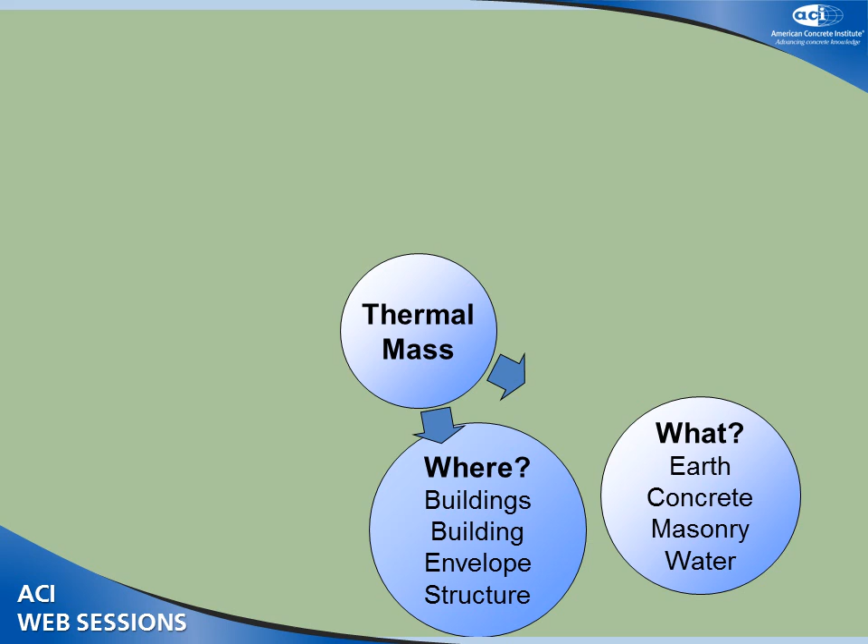One of the big questions I have in mind about this whole seminar is, number one, why are you here? What information are you trying to learn from these presentations that you can take back to your clients and customers? But also, why are we talking about saving energy? There are many different reasons you may want to save energy, whether it's to meet code, reduce your energy use, reduce your carbon footprint, whatever that happens to be.

But the information I'm going to talk about really centers around getting buildings down to net zero. That's buildings that produce at least as much energy as they use, so their net energy consumption is zero. We're not going to talk about carbon neutral buildings or thermal comfort buildings, but those are other reasons why you'd want to use a strategy like thermal mass to reduce your overall energy use.

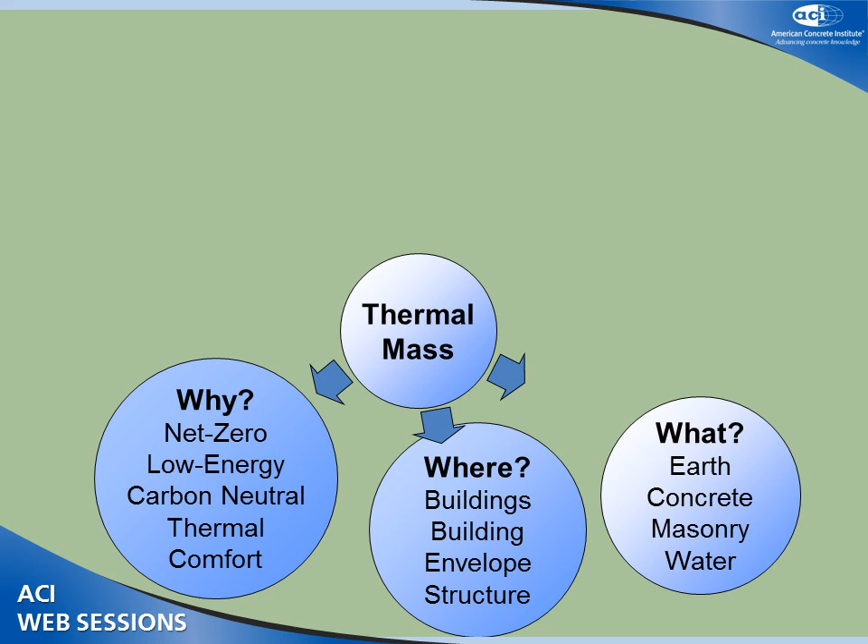The next big question I have is, who's the decision maker? Who is the person in the whole design and construction process that determines whether or not the building is going to have thermal mass in it, whether in the walls or the floor? It could be any of these players: the architect, the mechanical engineer, the structural engineer, the building envelope engineer, the owner even, or some consultants who work on lighting and acoustics who might have some input on using thermal mass inside the building.

But I really think it's the architect who decides. If they're passionate enough about a material or a process or something, they'll make it happen in the building. A lot of interesting energy features in buildings are there because the architect has a passion for it, and they're the champion for it. I don't really see too many architects having a passion for thermal mass, so I think that may be one reason why we're not seeing it used in more buildings.

But I think there's other reasons, and I'll get into those in the presentation. And then, of course, we talk a little bit about how to use thermal mass in the building as a strategy to reduce overall energy use.

We've got information from traditional forms of architecture that show us that thermal mass works really well and makes the building more comfortable. Classic example is Adobe-style architecture. We've got lots of experience with passive solar houses, decades of experience now, and hundreds of publications that tell architects exactly what the building needs to look like, what materials need to be used, what form it needs to have to reduce overall energy use.

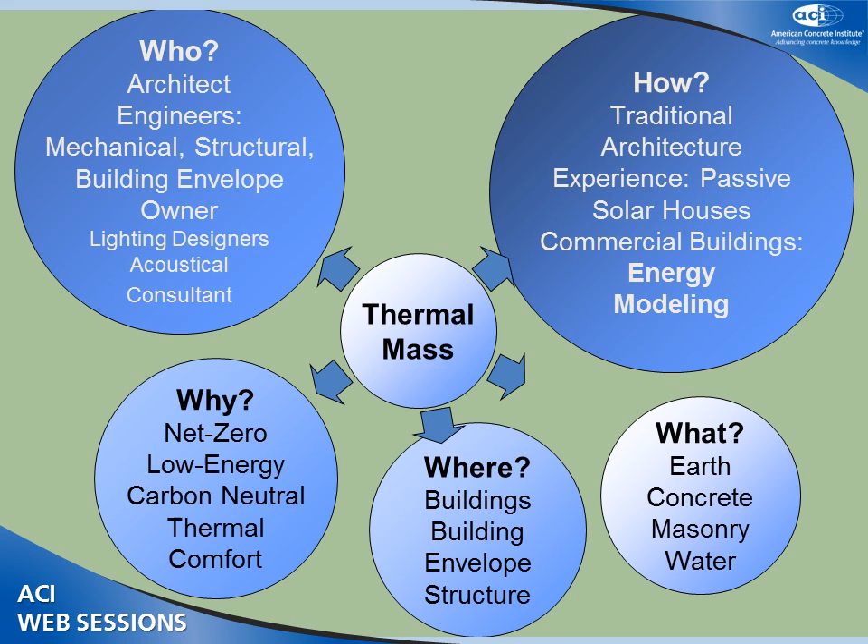And what we're trying to do in this presentation is to simplify it down to just a few parameters, so we can talk about it intelligently. But that's pretty difficult, as you'll see.

So just to give you a bigger perspective about design and construction in buildings, this is the traditional design phases for architecture, starting at concept phase or pre-design, where the architect meets with the owner to determine the owner's project requirements, and they also do some background research on what the site has in terms of site resources, like prevailing winds, environmental considerations, such as whether it's a wetlands area, and what the local zoning requirements are for buildings.

Then they move into the schematic design phase, where they take this information and come up with some general ideas of what the building will look like to meet the owner's project requirements. That'll typically be a floor plan, a site plan, a couple of building elevations, and some building cross-sections. But nothing more detailed than that, typically.

Then, during design development, they take the next step and choose one of those schematic designs and further develop the details. Then, during construction documents, they take those design ideas and produce a set of construction documents that someone can actually build and bid on. Then there's construction and occupancy.

So one of the questions I have: does anyone know when energy modeling happens in this design and construction phase? Do you think it happens at the beginning during the concept phase? Do you think it happens...

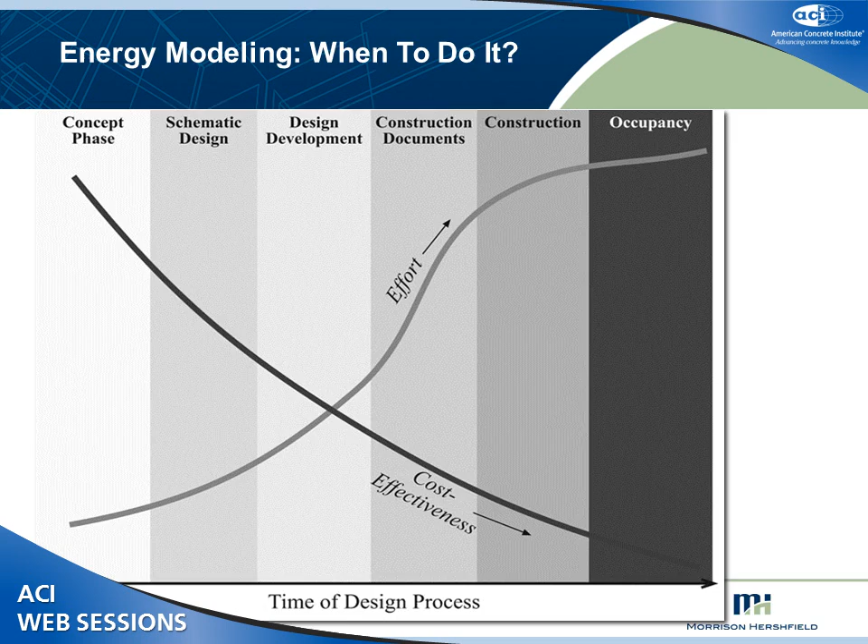And so the first thing you need to do is consider the climate, because the climate determines what free resources are available for you to heat and cool your building, and it determines what loads are going to be on your building, the heating and cooling loads.

After you've done the climate analysis, then you can set some goals for your building that are realistic for that climate. Then, still in pre-design, you create a pre-design baseline model. That's a very simple computer representation of the building before anything's been drawn, so it's just a generic model of your building. And using this generic model, you can do a lot of what-if scenarios.

What if I double the floor thickness? What if I decrease the amount of mass in the wall by half? What if I put an R value of 40 in the walls versus the code required minimum?

Because this is a pre-designed baseline, you can do this really quickly. The model's not very complex, and you can get a lot of really useful information that you can make design decisions on really early on. So that by the time you get into design development, when the building form is already taking shape and it's kind of fixed, you can kind of dispense with all those what-if questions.

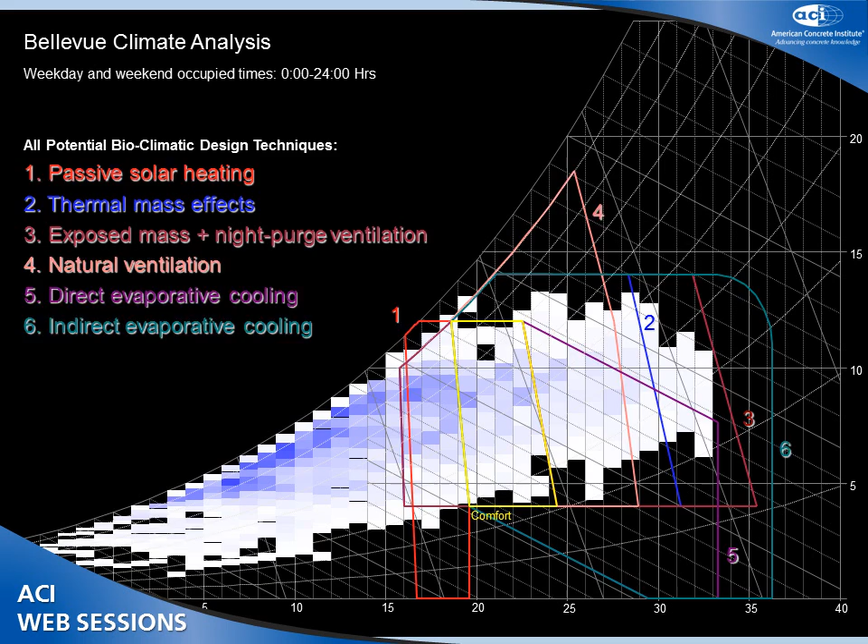But using a software tool called Ecotect, you can overlay on top of that the impact of different design strategies that can take those outdoor temperature hours and expand the number of hours where you'd be comfortable inside a building just with the existing weather conditions outdoors. So on top of that chart are plotted things like passive solar heating, thermal mass effects, exposed mass, and night purge ventilation. Then you can look at the strategies that result in the greatest number of hours where you don't need to provide any mechanical heating or cooling inside your building, just using the free resources of the climate where you are.

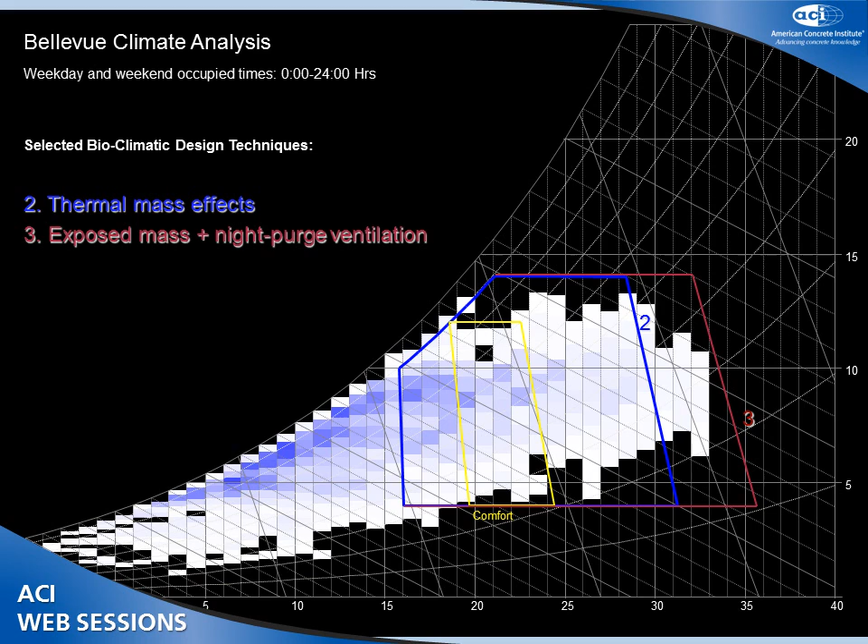For this particular building, in this particular climate, the two strategies that make the most sense are using thermal mass in the building structure to absorb excess heat, and using night purge ventilation, where during the daytime the mass absorbs the heat of the outdoor temperature and the sun, and at nighttime you bring in ventilation to cool the mass down so that the next day the mass is cold and ready to absorb excess heat. It's a way of offsetting air conditioning loads. I'll show you a specific example of where this was done in a climate similar to Seattle's.

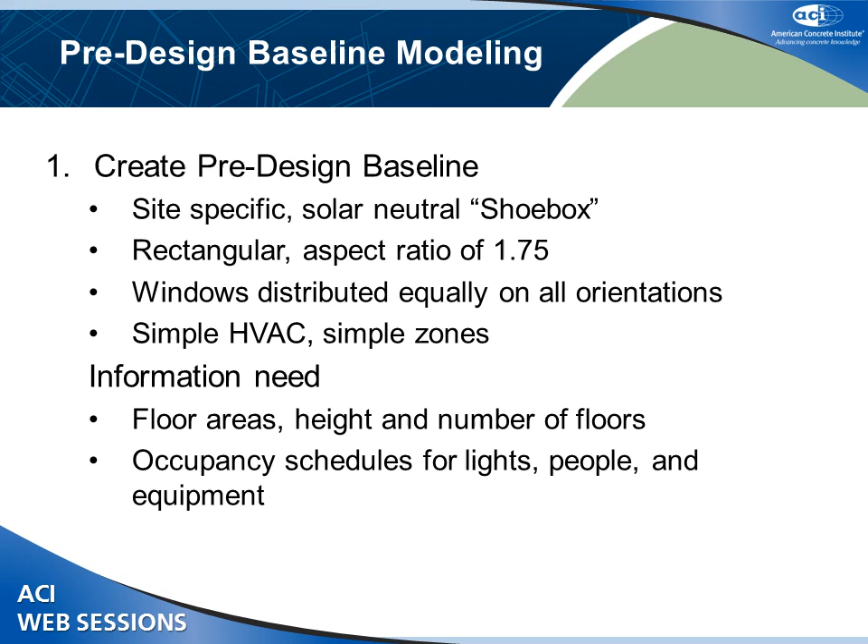So the baseline model is very simple. It's basically a shoebox model, just a rectangle. The only important thing to get right in this baseline model is you need to know what the floor area is of the actual building, which you get from the architect. Also the height and number of floors, and occupancy schedules for people, lights, and equipment. Because those occupancy schedules determine when people come into the building, when you need heating and cooling, and when you're going to use lights which generate heat that needs to be taken away by the cooling system.

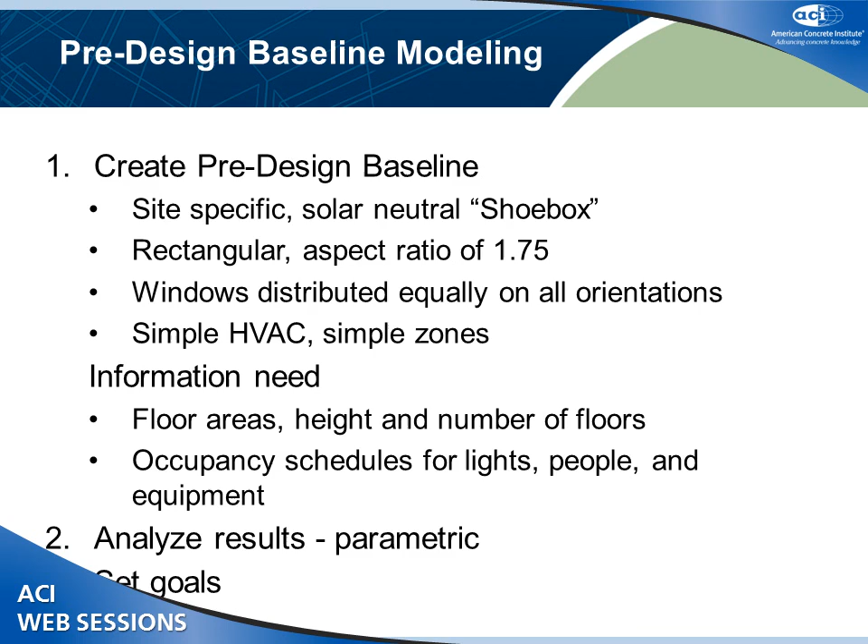And then you can analyze the results using what's called the Parametric Study. I'll show you a picture of it, and then I'll explain what it is. What you basically do is go through your building baseline model, look at all the loads on your building, and eliminate those loads in the model one by one to see what effect they have on the building.

For example, you might look at eliminating the opaque losses. What this does is it tells the model: I'm not going to have any heat transfer to my building envelope. This is a way of looking at what's the most energy savings I can get out of a building if I have the best thermal performance possible, like an R100 wall.

So you plug that into your baseline model, you run the model, and it turns out if your building envelope is perfect and doesn't let in any heat through the opaque portions, you can save 11% over a baseline building. The baseline building is actually quite arbitrary, it's whatever you choose for your particular project. In this case, we use ASHRAE 90.1, the energy standard, for the baseline.

Then you do that for every load, for every envelope component of your building, to look at what's the most energy savings you can bring out of these individual systems. So you do the same thing for glass conduction losses to see the effect of really good insulating glass versus single pane, and the same for solar gain, infiltration, and then all envelope parameters together.

That gives you an idea really early on where to focus your design efforts to make the building more energy efficient. In this particular case, most of the energy savings come from opaque gains and losses and infiltration. So that tells the architect, before they start to design anything, where they should focus their design effort.

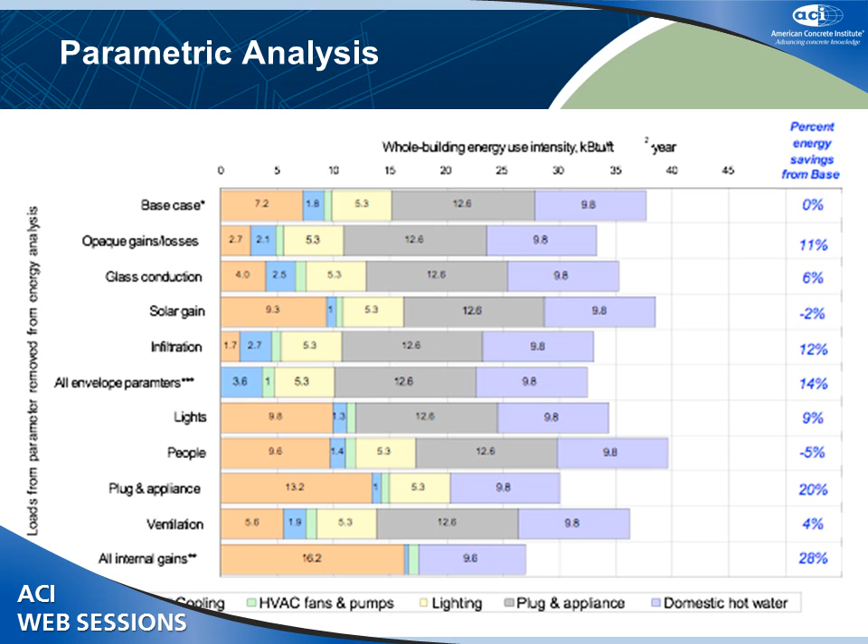Here's a simple example of using a parametric analysis on thermal mass. I can give you a reference to this paper if you're interested. It basically shows 3 different cities for a commercial building, the relative energy savings you get by including thermal mass in the envelope and in the structure.

The low mass building uses the highest energy and has the highest energy cost for all 3 of these cities. Using mass in the structure and in the envelope reduces that energy use and energy cost, and then combining the best envelope strategies...

...minimizing thermal bridging, minimizing the size of windows, because you don't need windows to be very big to get natural daylighting — 20% is kind of a rule of thumb — and improving the solar heat gain coefficient of the windows can go a big way, combined with thermal mass, to reducing energy use and cost overall for these types of buildings.

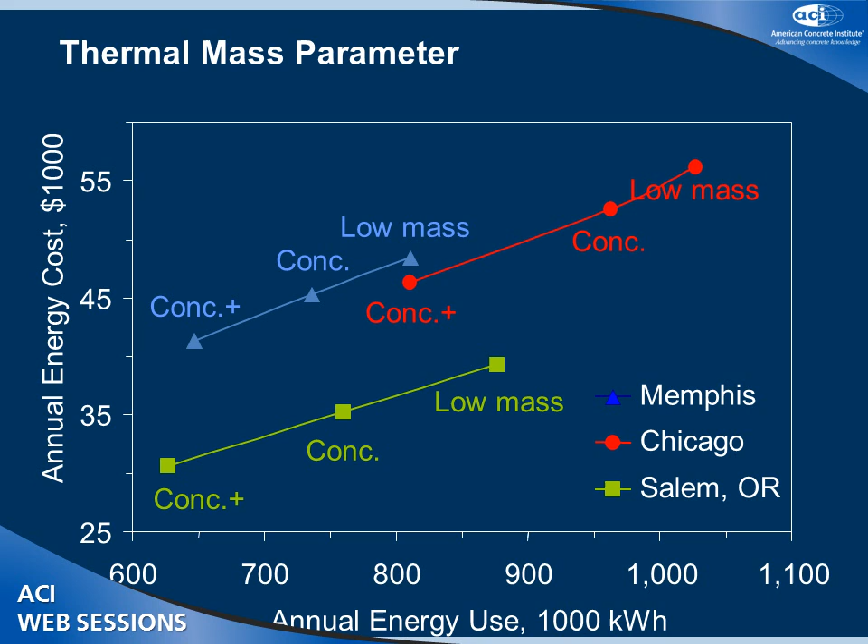I'll skip this to save some time. So then the next step in the whole energy modeling process is to take what you've learned in pre-design, create some realistic goals for that project in terms of reducing energy use, and then do a detailed study on those potential energy saving measures.

I'm going to go through the schematic design baseline model step by step, only to make a point about the heating, ventilation, air conditioning system design. In schematic design, again before you've designed very much of the building, there's very few drawings, so very little is written in stone.

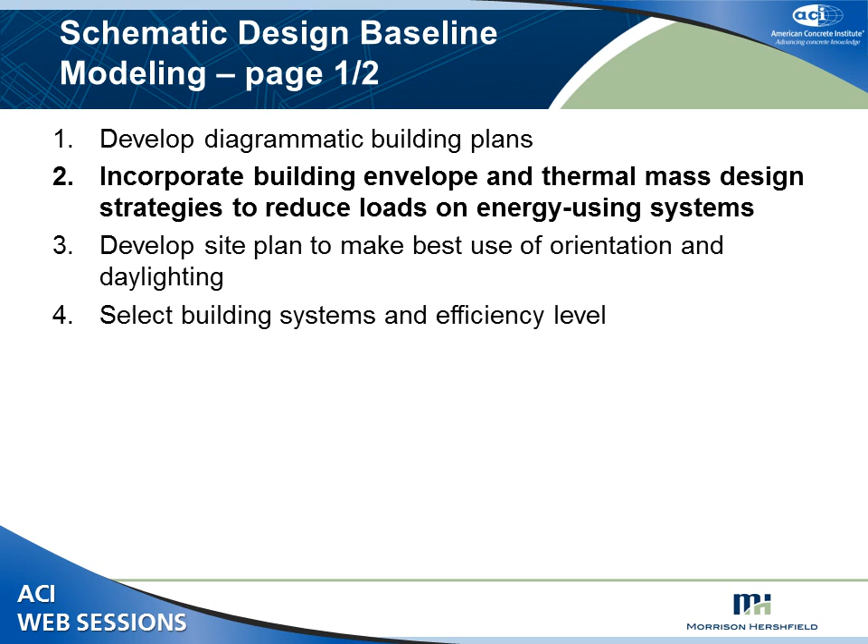In schematic design, you take the diagrammatic building plans, incorporate building envelope and thermal mass design strategies to reduce loads on energy-using systems — that's the second stage. Develop a site plan, select the building systems and efficiency levels, develop building plans, sections and details, and do a design review to verify the project meets the original goals.

Now at this point is when you calculate the building's HVAC loads. What typically happens is the building's HVAC loads are calculated before any design decisions are made on reducing the loads in the first place.

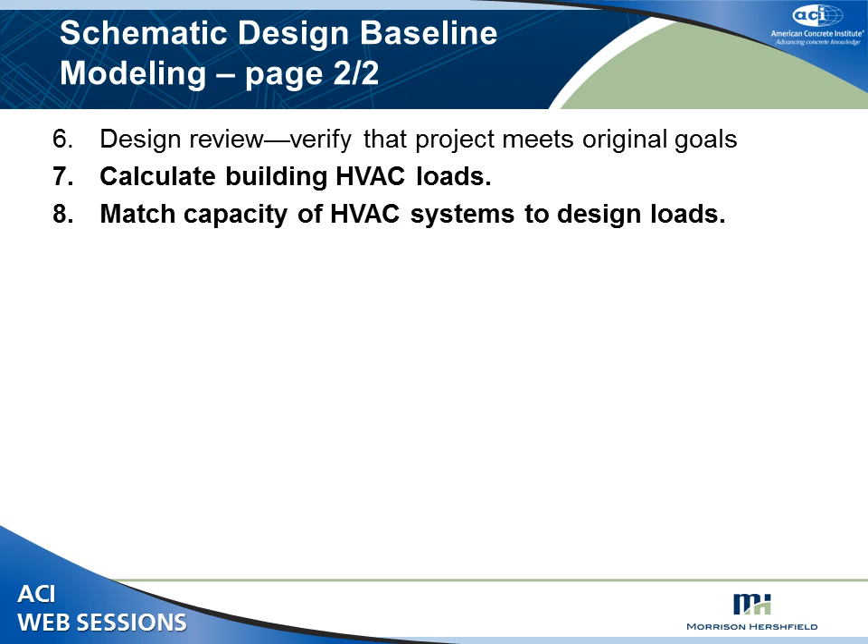So then the next step is to match the capacity of the HVAC system to those reduced loads, instead of doing it the other way around, which is what we've been used to doing — first designing the system based on assumed loads and then trying to reduce the loads after the system has been designed.

And then finally perform a final coordination and integration of the architecture, mechanical, and electrical systems in the energy model. Develop specifications, and then finally, as part of schematic design, develop a set of commissioning standards or procedures. The purpose of doing this is to make sure that what you've designed is actually what you get when you build the building. So the owner determines how they're going to demonstrate that what they want in their owner's project requirements is actually being delivered at the end of the construction process.

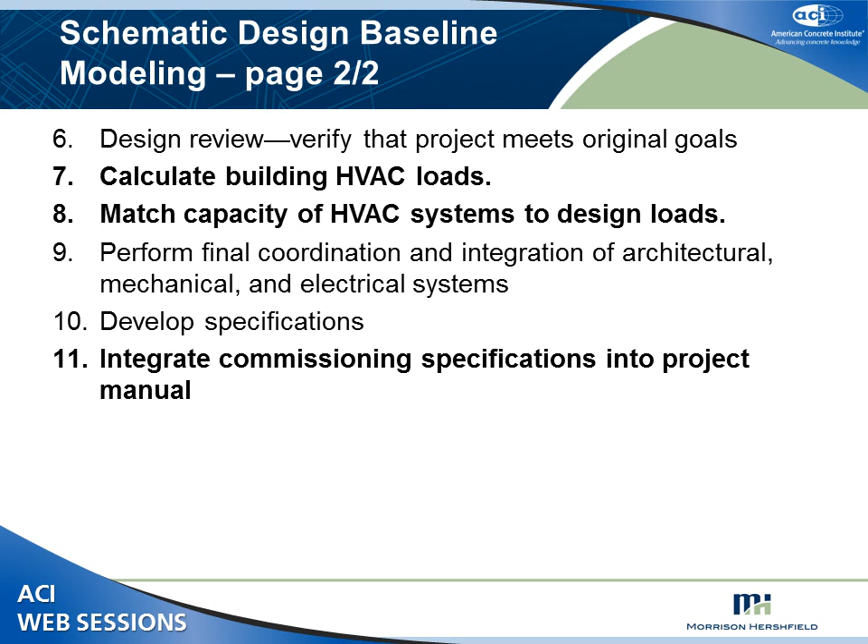I'm going to skip through a bunch of these for the sake of time. So here's some information produced by the New Buildings Institute in Seattle. What they've done is gone out and measured a lot of buildings, and looked at how buildings really use energy. Then they made computer models to predict how those same buildings would work in other climates using that same measured data, so the models are calibrated to actual real-world conditions. What they did for this example is for Seattle, and we have this information for 8 cities across the U.S. It's only for one building type—commercial office buildings, kind of medium size. But there's a need for doing this for other building types as well.

What we have here, the 0% is kind of average construction. So they figured out for commercial buildings in Seattle, what's typical average real-world construction? R6, R7 walls, economizer on the HVAC system—kind of basic stuff.

Then they looked at what's typically used in a high-performance building in Seattle, and how that affects energy use. That's what they plotted on the green bars below the 0% line. And then they looked at some of the crazy things that actually happen in the real world that make energy use increase—things like excessive thermal bridging, or the wrong kind of glass installed that doesn't have the solar heat gain coefficient that was specified, or the building's economizer system rusted shut and doesn't work. That's what they plotted on the upper scale, to show the additional energy the building could use if things go wrong.

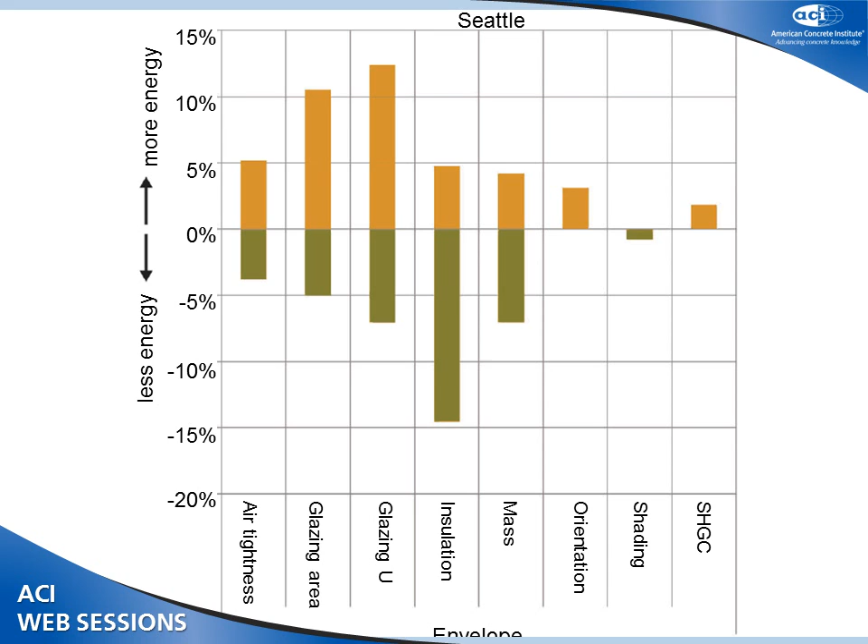Going all the way over to mass, lightweight buildings that don't have any thermal mass can use up to 4 to 5% more energy than a typical building in Seattle. By incorporating thermal mass into the structure of the building—and this just looked at thermal mass in the floors—energy use can be reduced by up to about 7 or 8% over a typical weather year.

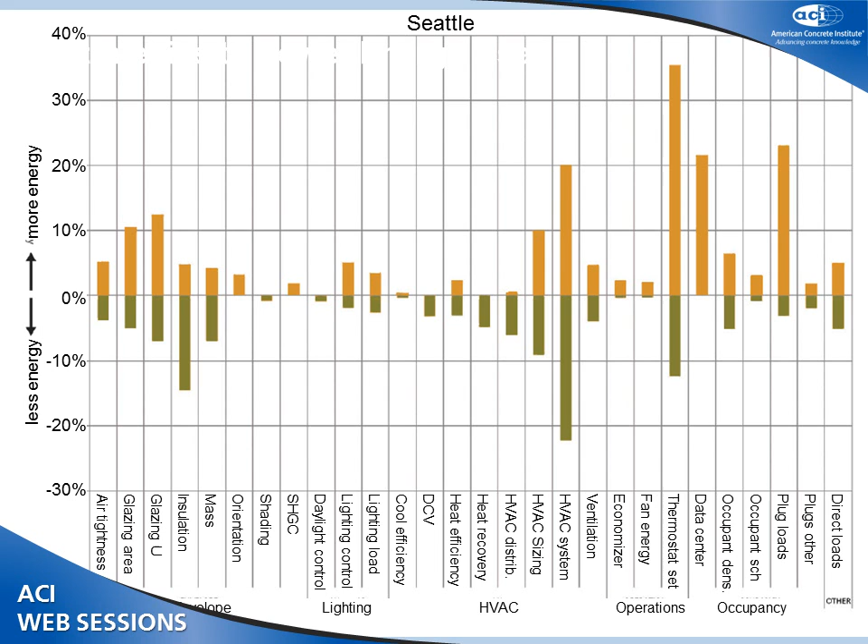If the operations staff finds it too inconvenient to keep maintaining windows that open and close automatically, they may just not maintain them, and then natural ventilation no longer works. So this strategy, designed to make the building use less energy, ends up being sabotaged by the operations staff because it's just too much work to maintain the systems.

So in this particular building, this is real life, real measured data. Thermal mass isn't producing all the cooling, but it's offsetting a significant part of it. And this building has one of the lowest energy use intensities in Australia.

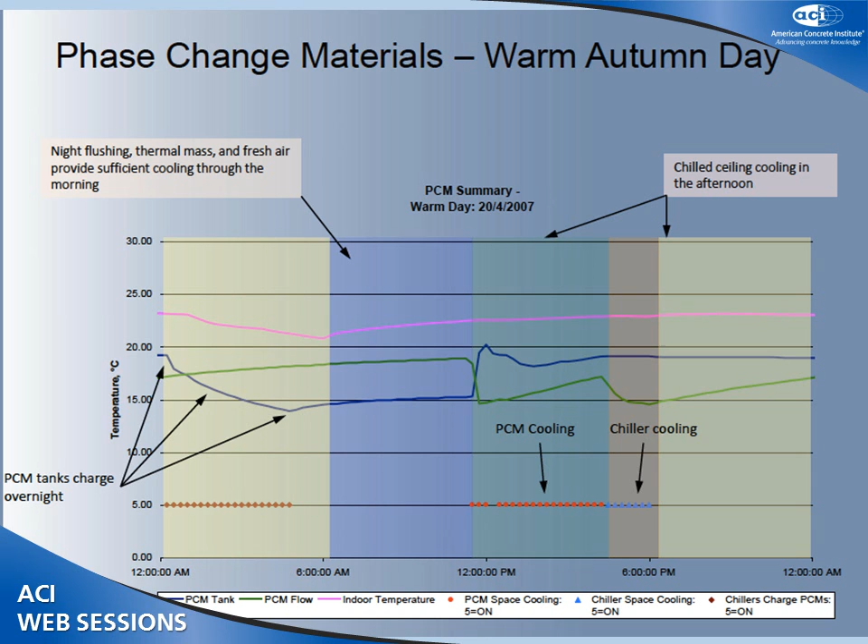Now here's another building that uses a lot of the same strategies. It's in Seattle — some of the same energy modelers worked on this building as the one in Australia. But this one doesn't use thermal mass in the ceiling. It's the same kind of office, the same kind of climate, so why not? The answer is the structural engineer didn't want any more mass in the building because Seattle's in a seismic area, and to meet his seismic design, he wanted as light a building as possible.

So this goes to show there are a lot of interrelated factors to using thermal mass. It's not just a matter of putting it in the building — there are other considerations that we as energy modelers often don't think about, like seismic structural issues.

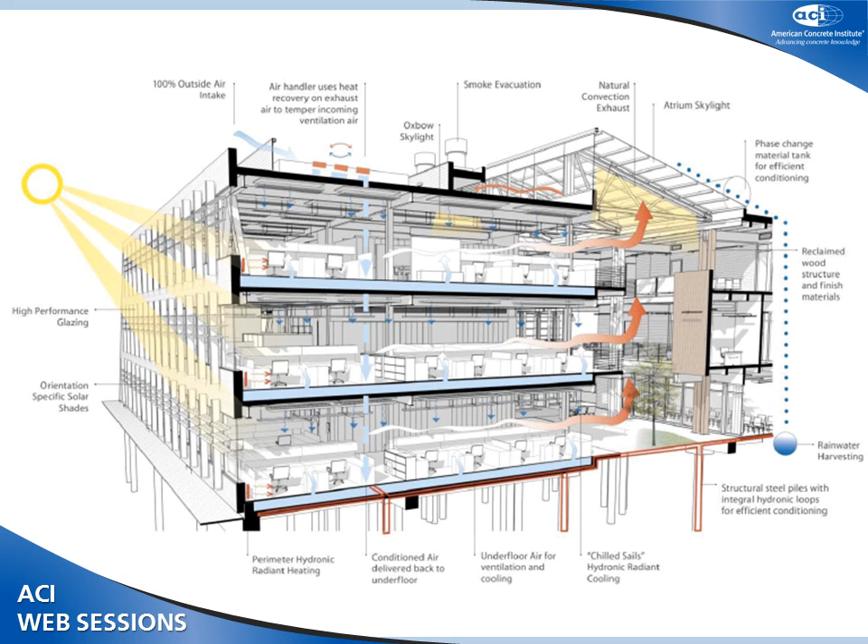So to summarize this section, the overall strategy to reducing energy use in buildings should always start with load reduction. Before you do any design, before any mechanical sizing, the number one priority is to reduce the loads on the building. Number two, use passive strategies to make up for that additional load, like daylighting, natural ventilation, and thermal mass. Number three, use the most efficient mechanical systems you can afford.

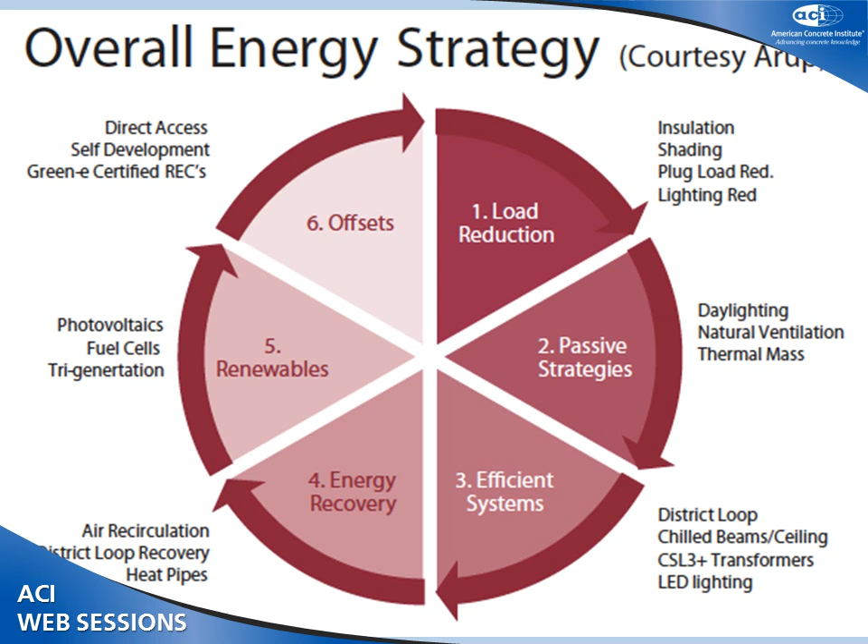Number four, use energy recovery. Number five, use renewable energy for the remaining energy that you have. And where renewable is not practical, buy offsets. This is a strategy used in a lot of high performance, low energy buildings to get them down to that net zero target.

Just a few things that you may have heard before, but these always work at reducing energy loads in buildings, regardless of where the buildings are in the US: minimize glazing on the east-west sides of the building. That always reduces energy loads.

If you could have no windows on the east-west facade, that would be ideal. Unfortunately, in some places like Seattle, all the views are to the west or to the east. And so building owners want to have all their glass on the west and the east.

That building that I showed you the drawing of, that was one of their issues - they wanted the views to the west of the mountains, and so they put a lot of glass on the west. But they knew up front that this would cause them to use more energy than if they had put all the windows in the north and the south. At least they had the information to make an intelligent design decision.

Minimize solar gains with shading during peak cooling periods. Optimize the R value for the climate and building occupancy. Eliminate thermal bridges. Use thermal mass - it works in most climates. Maximize southern exposure, and orient the building with a long axis east-west. These are all strategies to use the free energy of the sun and the climate to reduce energy use and use prevailing winds for ventilation.

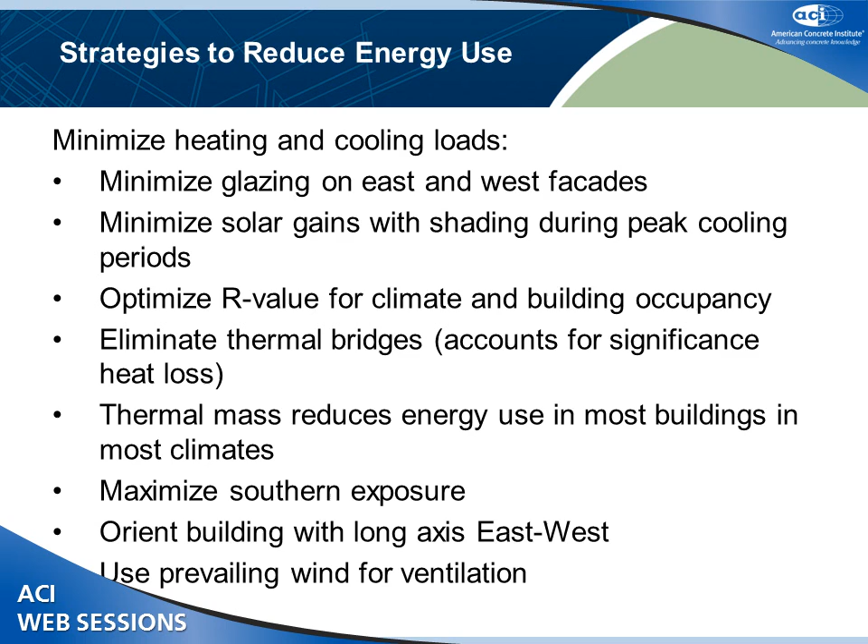So the last part of this presentation is going to talk about some of the needs that I see as an energy modeler when it comes to thermal mass.

So I know that thermal mass can save energy, and I know that integrated design and post-occupancy data shows that thermal mass saves energy. But a lot of buildings don't use thermal mass to save energy. And why is that?

I think part of the reason is because energy modeling is not very accurate because of our inputs. And we assign to energy modeling an unrealistically high baseline model that we make our comparisons to.

Typically the baseline model is the energy code, but how many buildings in the real world are built and perform the way the energy code says they're supposed to? The energy code says, in Seattle for example, you need R19 insulation in the stud walls, and then about R8 continuous insulation outside the stud walls.

And I've reviewed other energy modelers' models, and they've modeled the R value of those walls as R20. Well, it's not R20. There's thermal bridging at the slab edges, around the windows, at the roof line. There's all kinds of issues. You're lucky to maybe get R5.

So the benchmark building is modeled as R20, because that's what code tells you to do. And then the architect's scratching their head thinking, how can I get better than R20? I'll try R25. And energy modeling says it doesn't have any impact - you don't save much more energy. Well, it's because the benchmark you're comparing to is unrealistically high. It's already a high-performance building, in my opinion.

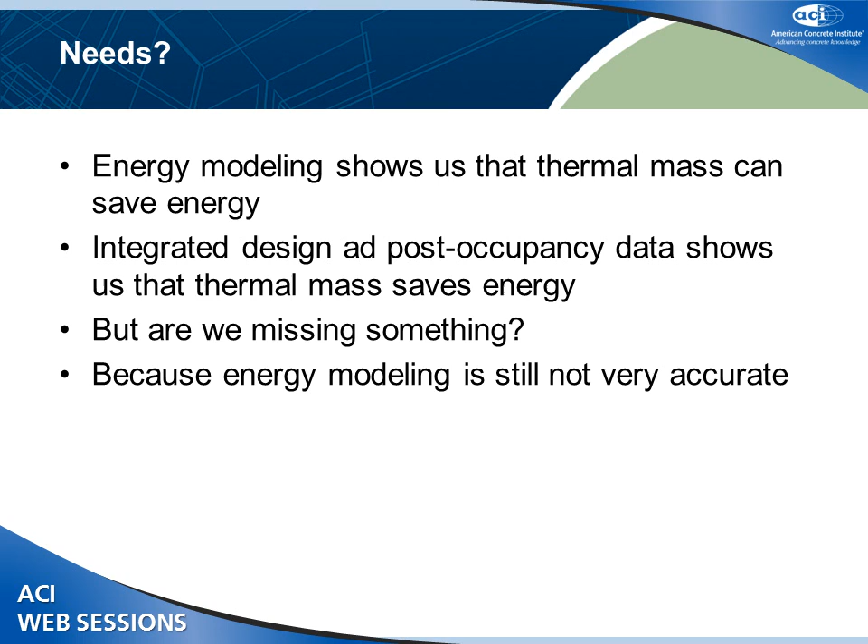So we live in a 3D world. Heat loss in the third dimension is real. It's rarely accounted for in energy codes, and it's almost never accounted for in thermal modeling. And the impact of heat loss in 3D can drastically reduce your R value.

I'm only showing you this information because I think in the thermal mass world, we need something similar - a study to show us a simple way of dealing with thermal mass in the building envelope and in the building structure.

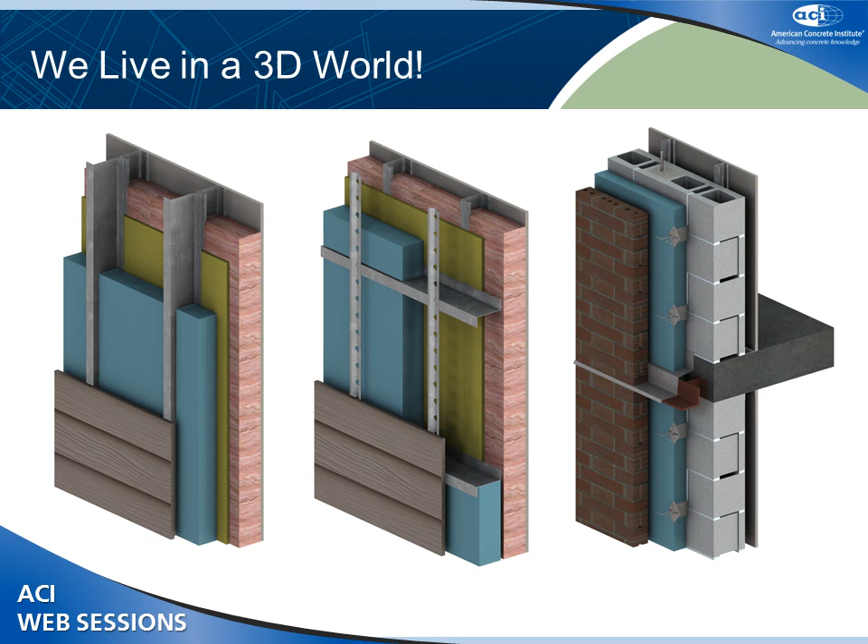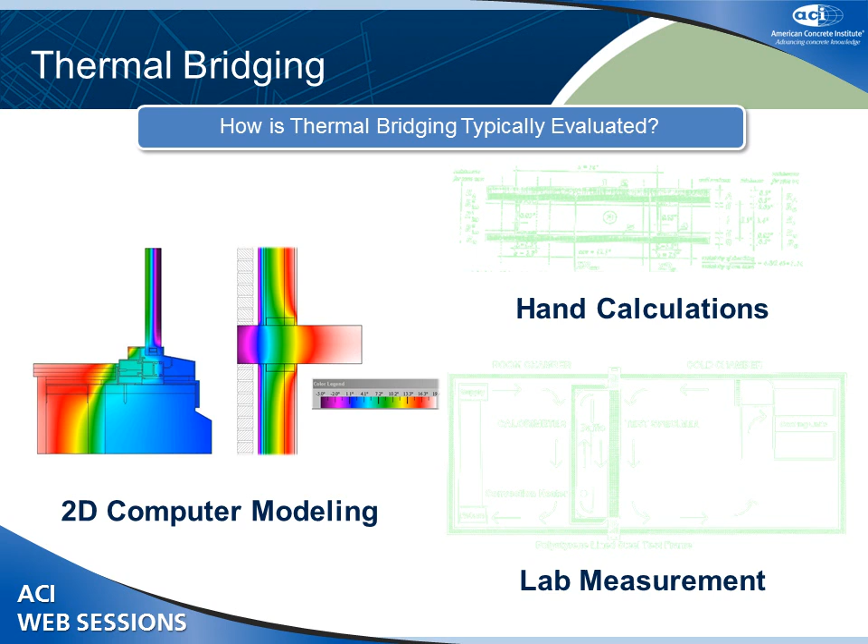So this study is from ASHRAE that my firm worked on over the past couple of years, and we looked at modeling heat loss in 3 dimensions for typical building envelope details in the commercial building sector. In the old days, very recently, we'd use 2D modeling, even hand calculations, even laboratory measurements to calculate or measure the building's R value. Well, that works really well when heat loss is 2-dimensional, but it's not - it's 3-dimensional.

So the purpose of this project was to look at typical details and calculate the effective R value of those details, if you will, and come up with a way that makes it really easy for energy modelers to put this information together and get the input for their energy models of what the building envelope R value really is.

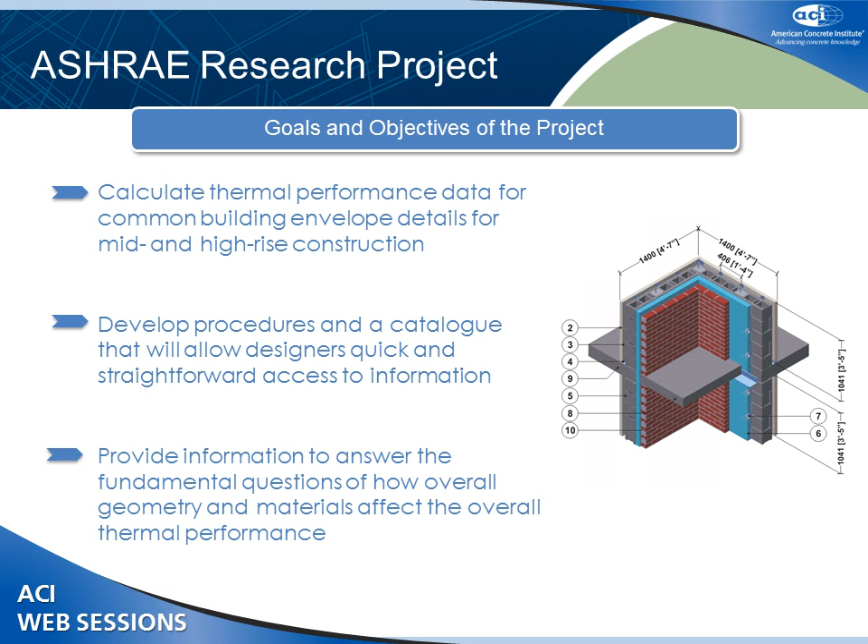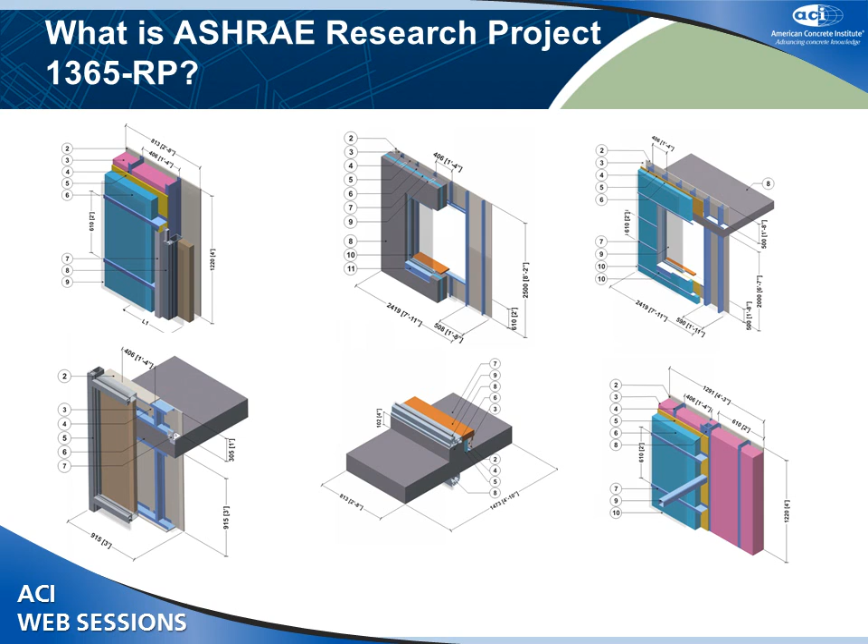I won't go into the details, but here's some typical details we looked at: cladding attached through exterior insulation with metal girts, window openings, curtain wall openings, precast concrete, cast-in-place concrete at all the transitions.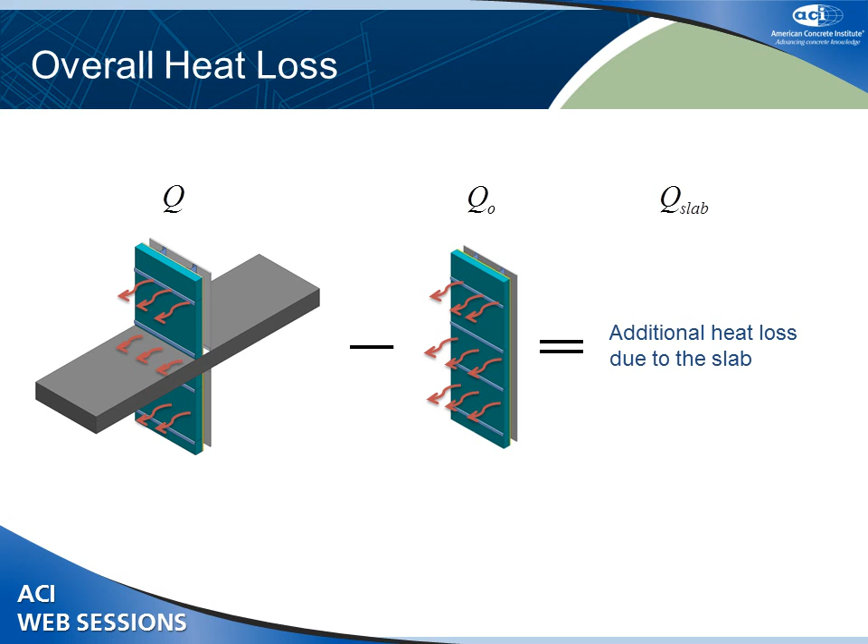Subtracting the two gives you the heat loss due to the slab. Now with this result, I can take the heat loss due to the slab, divide it by the length of the slab, and find out how much heat loss I have in that whole building because of the slab. If I know I've got 20 stories and they all have slabs like this, I can figure out the heat loss through all the slab edges, divide by the area, and get the effective R value because of the slab edge.

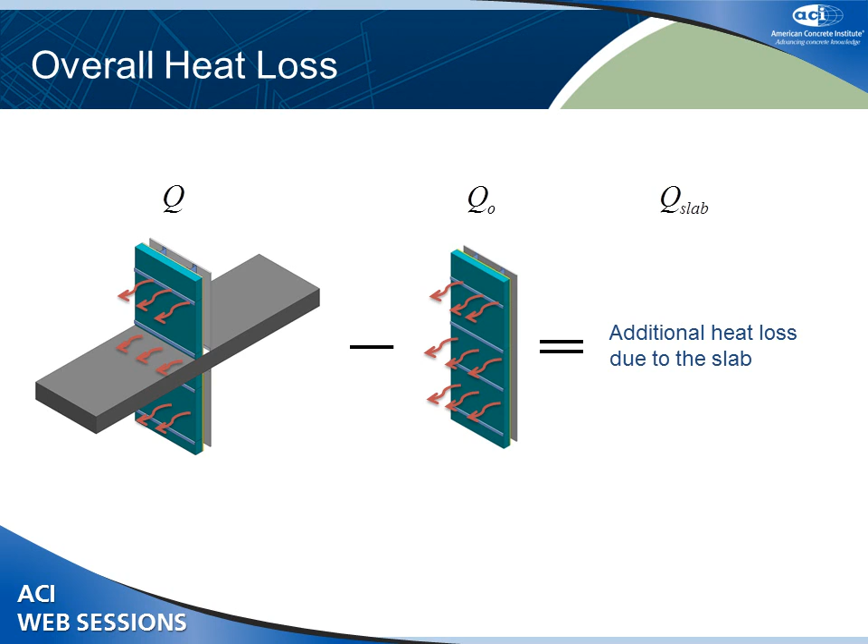It's called linear transmittance. I hope what we see in the next few years is that we stop talking about R values and U factors, and start talking about heat loss—how much heat loss is there through the envelope?

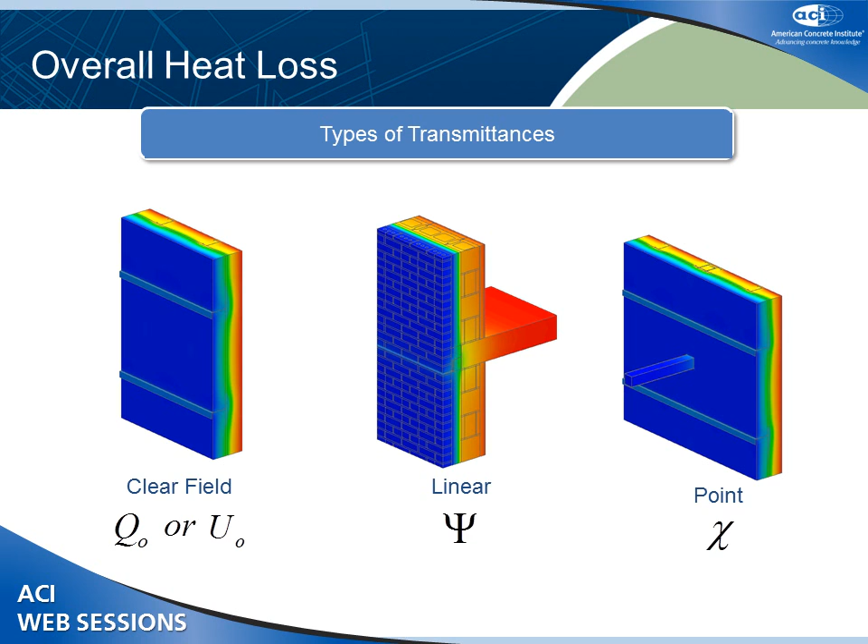So I showed you a slab edge condition. You can do the same thing for a point load, like metal supports that penetrate the building envelope to support a canopy. That's just the equation—let's get through that.

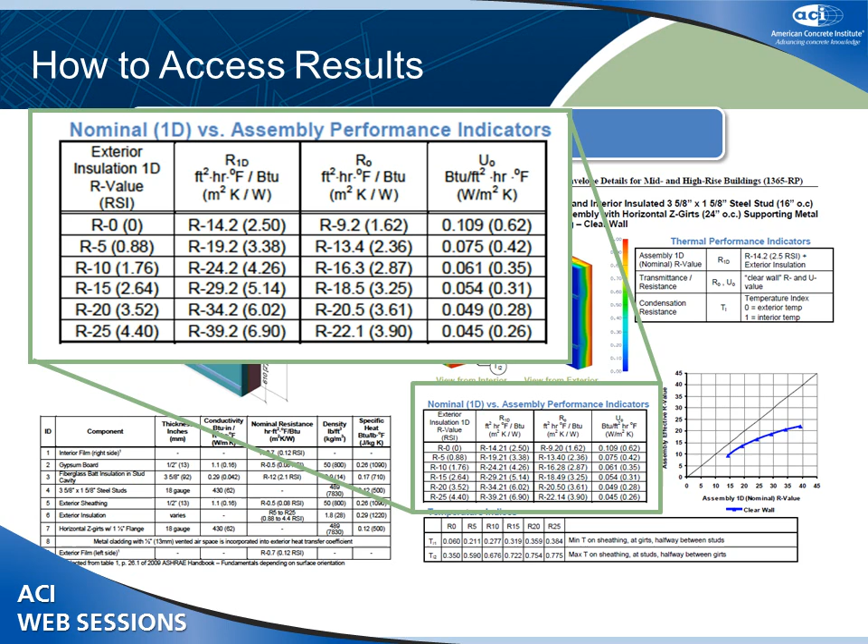Within a few minutes, you can calculate the building's overall R value way more accurately than we've been doing it before. If you were going to do it using 2D modeling, it would take several days. So the purpose of showing you all this is just to show that we've come across this new way of getting information that's a lot easier, that makes modeling much more accurate.

So we're actually going to do it now. I think we need to do something similar for thermal mass—to take all this complex information and distill it down into some form that's really easy for designers and energy modelers to use, so that when they're telling the architect thermal mass does or does not save energy, it's based on real-world measured data.

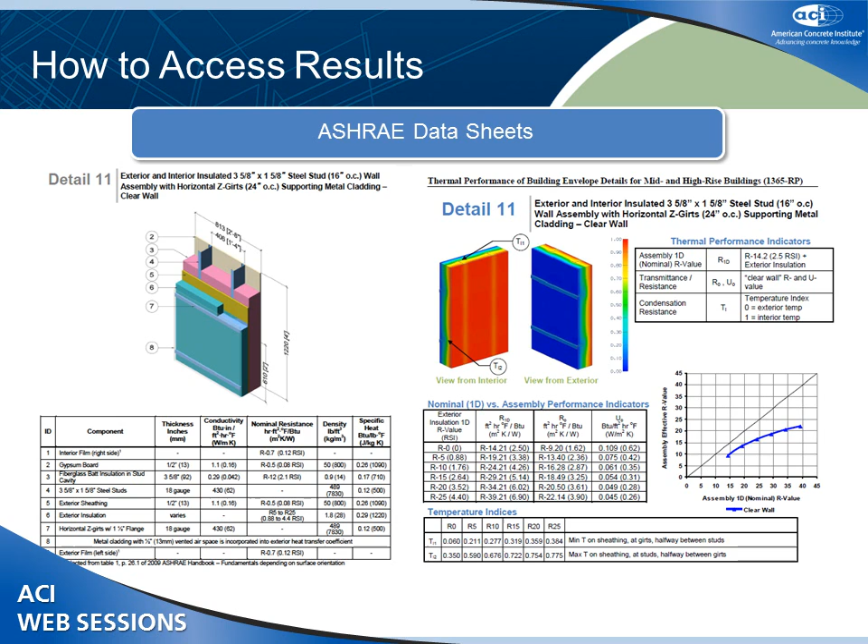I'm going to skip to the end of the presentation. Thank you very much for your time. Do you have any questions?